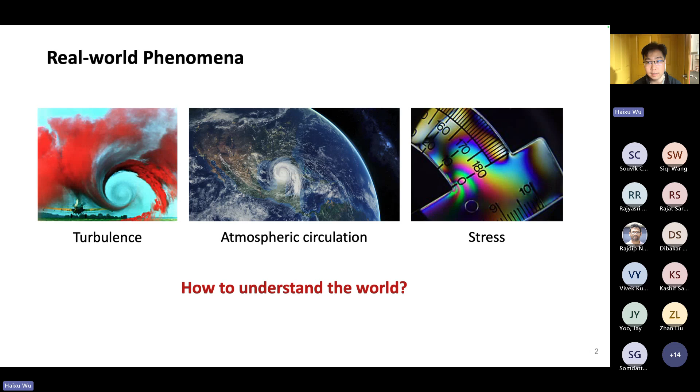Okay, I would like to start with some background. In the real world, there are very interesting phenomena like turbulence, atmosphere circulation and stress. A long-standing and fundamental question is how to understand the world. Because I'm from the machine learning community, a widely used and well-established approach is data-driven, which usually starts from intuition or vision. It means we can record this process as images or videos using a camera or other types of sensors. After that, we can learn a vision model to approximate these dynamics. This approach works in some tasks, which is also named world model by some researchers. However, current video models still struggle in modeling the physics process very accurately. Sometimes the generated results are not very physically reliable.

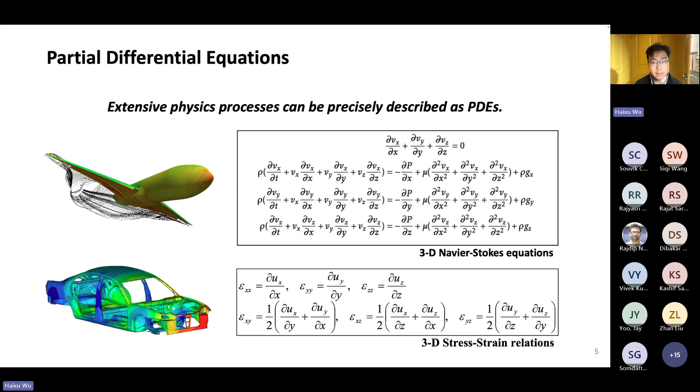If we think about this phenomenon from a more basic view, we will find that these phenomena are inherently governed by scientific rules. Specifically, extensive physics processes in the real world can be precisely described as partial differential equations, PDEs for short, such as the Navier-Stokes equation shown here for fluid dynamics, and the stress-strain relation in solid mechanics shown here. Accurately solving these PDEs is very important in understanding the world and supporting engineering, such as weather forecasting and industrial manufacturing.

However, solving PDEs is actually a great challenge, and the Clay Mathematics Institute lists the problem of Navier-Stokes existence and smoothness as one of the seven Millennium Prize Problems, in parallel with the P vs NP problem in computer science. So it's really hard and usually impossible to obtain the analytic solution of PDEs. Fortunately, after decades of efforts, we have very mature numerical methods, such as FEM or spectral methods. These methods can solve PDEs very stably, but suffer from huge computation cost. If you want to simulate a car, it may take hours or even days. And if you want to simulate some high-speed fluid, it will take more time.

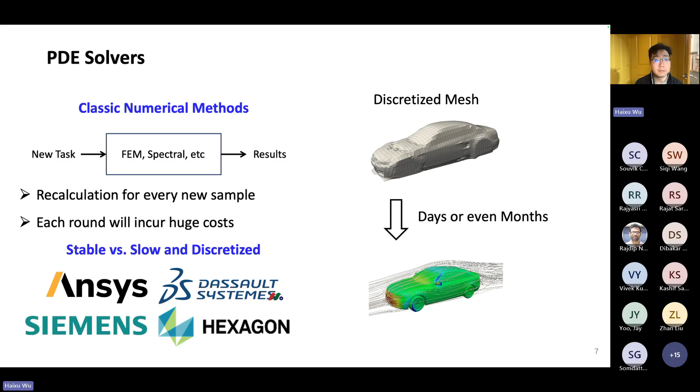Recently, some neural PDE solvers have been explored, which are based on a pure data-driven paradigm. Researchers attempt to utilize the learning capability of neural networks to build an efficient surrogate tool. Once the model has been trained on PDE data, it can make inference within several seconds. So it's very efficient during the inference stage.

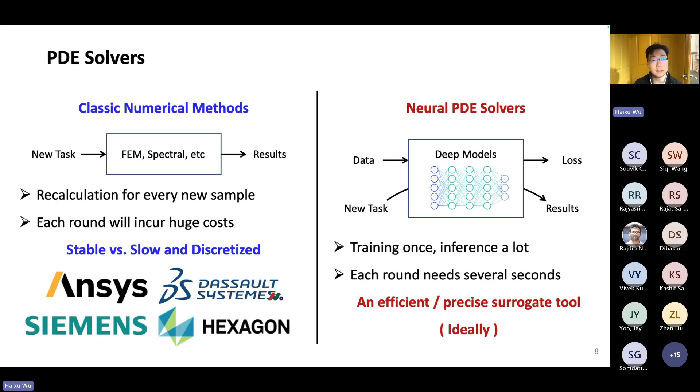And neural PDE solvers have already been used in some simulation software, such as SimAI in ANSYS. The workflow is: you pre-train a model to simulate the car, and after that you can directly apply the model to the design process to get immediate feedback. In this way, you can speed up industrial design.

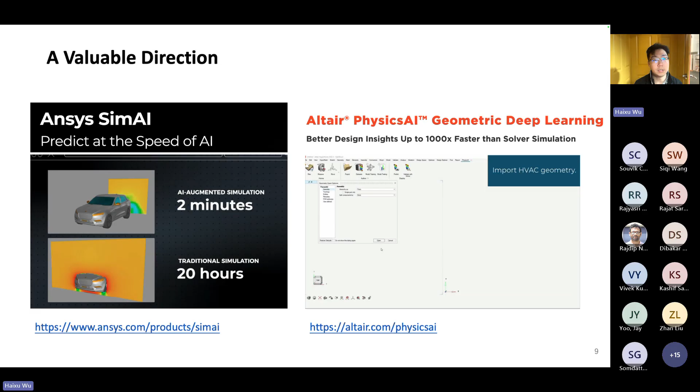And there is another software named PhysicsAI in Altair. This software supports directly applying the PDE solver to CAD geometries, meaning the input is not the computation mesh but the continuous geometry. So it can directly apply to the design process.

And these are two introduction videos to present how this type of software works. There are a lot of industrial software that can enable AI-powered capability. So I think this is a very valuable direction.

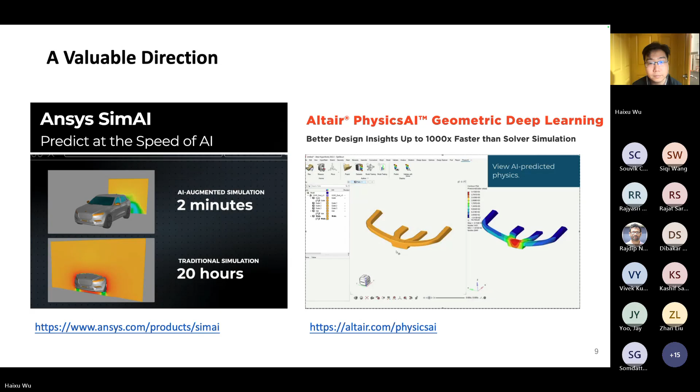And neural PDE solvers are not only a hot direction in the physics community, but also a booming direction in the ML community. Since 2024, every mainstream ML conference holds special workshops or tutorials to discuss the topic. I can still remember the AI for DE workshop at ICLR 2024. The meeting room was so crowded that I couldn't even enter. So I think this is a very hot topic in the ML community.

And additionally, I think PDE solving is still an unsolved problem. You may have seen some demonstrative videos from Google Genie in recent days because it's really popular. The left case is released by Google. You can see Google Genie can simulate very complex fluid dynamics in the realistic world. I think the performance is quite impressive.

And the right one is a test case from Twitter, where we can find this model, although it's good at the realistic world, is still struggling to generate physically reliable dynamics. If we focus on expert domains like industrial design, it's not very perfect.

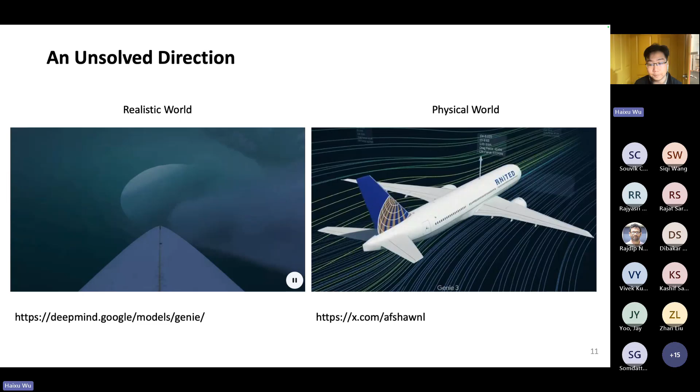During the past 2 years, my PhD lab and I have focused on this challenging problem. We have attempted to build practical neural PDE solvers, which can support complex geometries, high-fidelity simulation, as well as diverse simulation scenarios in industrial design. Due to the time limit, I will only focus on the first two parts, how to solve complex geometries and large-scale meshes, and I will present our exploration in Transolver, Transolver++, and Transolver-3.

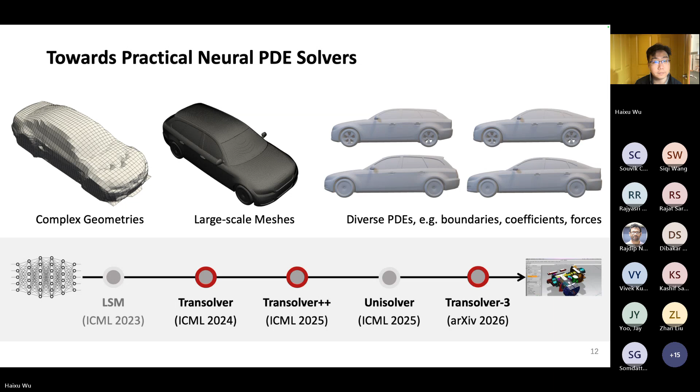Okay, the first one is Transolver, a fast transformer solver for PDEs on general geometries. I would like to start from an industrial design problem: you want to design a car, and you need to estimate the drag coefficient of every design. It requires the model to predict the surrounding wind and the surface pressure, which is quite difficult because it involved a lot of difficulties for neural networks at that time.

First, it needs to handle large-scale geometries, which bring a huge computation cost. Second, it involves very complex and unstructured geometries, so you need a good geometry representation. Third, the governing equation drives intricate physics correlations, because it's driven by Navier-Stokes, and this equation is quite complex under different scenarios.

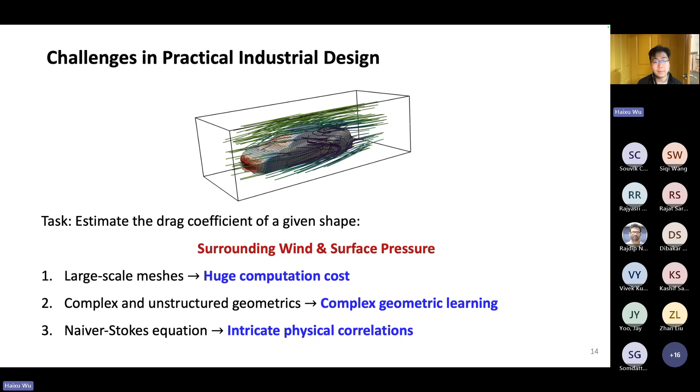Although there are some prior explorations on GNNs, like GNO, and some based on Fourier bases, their performance is not very satisfactory in such tasks. In this work, we want to explore transformer-based PDE solvers. The transformer can be viewed as a foundation of modern deep learning, so if we can introduce such an advanced backbone into the PDE solving community, it will unlock a lot of advanced deep learning techniques. So I think this is very exciting.

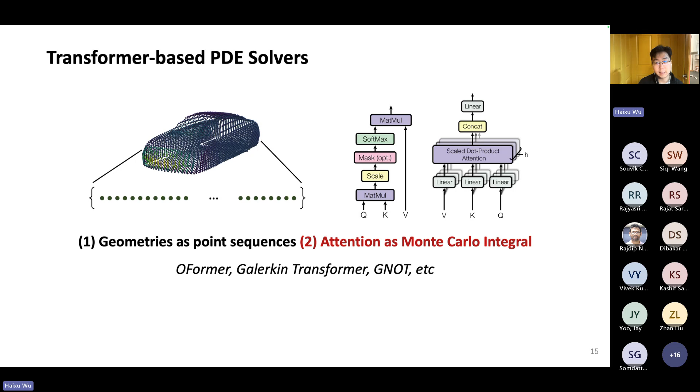Under the PDE solving context, basically we can flatten the computation mesh into a point cloud sequence and adopt the attention mechanism to calculate the physics correlations among different mesh points. This can be formalized as a process to approximate a Monte Carlo-based integral, so it has some theoretical foundations.

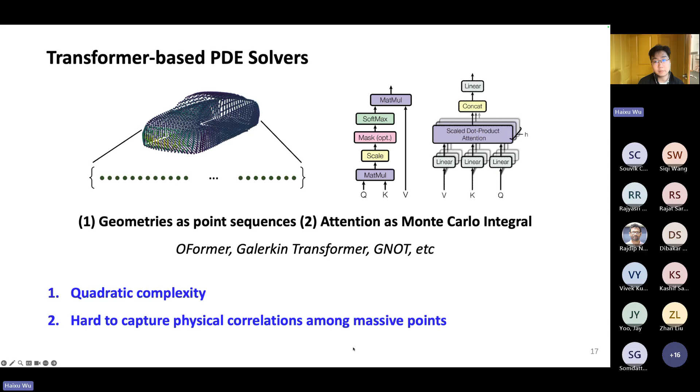And despite there being a good theoretical understanding and expressive capability in Transformer, directly applying the Transformer for PDE solving still suffers from two drawbacks. The first one is quite obvious because attention mechanism is of quadratic complexity with respect to the sequence length. So you can only process meshes within a certain number of points, otherwise you will suffer from the out-of-memory problem. And secondly, it's really hard to capture the physics correlations among massive mesh points. The attention learning will be overwhelmed.

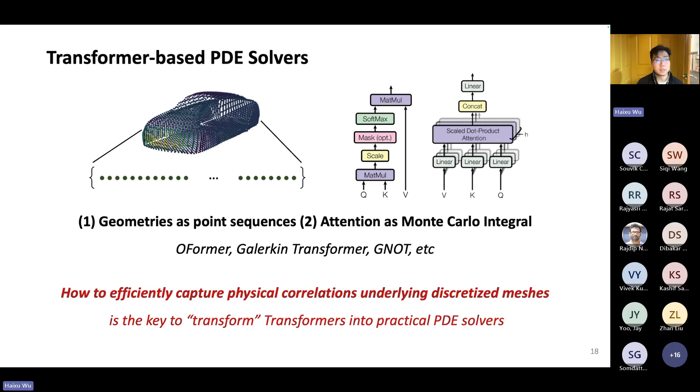But we think how to efficiently capture the physics correlations underlying the discretized meshes is actually the key to turning transformers into practical PDE solvers. So I think this is the key insight when we're designing Transolver, Transolver++, and Transolver-3.

And based on this idea, we want to present Transolver based on a very fundamental idea. As we discussed before, the computation mesh can be viewed as a sampling of the continuous domain. And the previous works are basically trapped in these sampling meshes. So I think their modeling is from a very superficial or unwieldy viewpoint, and they will suffer from many difficulties in computation complexity, geometry modeling, and physics learning.

And in Transolver, we attempt to learn the underlying physical states, which I think is very intrinsic, and it can naturally bring better efficiency, geometry learning and physics modeling. So this is the basic idea of Transolver. We want to get rid of the unwieldy computation meshes and focus more on the continuous domain.

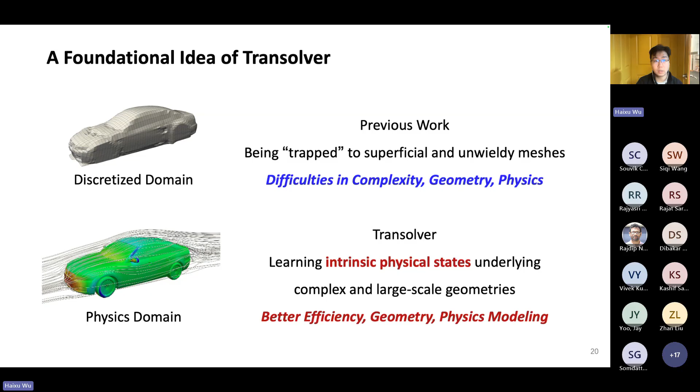And when I'm talking about the physics states, I mean the internally consistent clusters. Here is a visualization of Transolver's learned physical states in different PDE solving tasks. For example, in car simulation, the model learns to ascribe all the front surface, like here, to a token, to a physical state, I mean. The highlighted region means the related points in a certain physical state, and the rear parts of the car are in another state. And we name this learning process of physical states as slice, because it's intuitively like we slice the physics domain into several subparts.

And after that, the physics states are further encoded to several tokens, and we name those physics-aware tokens. If you are familiar with computer vision, you may find that the basic idea is quite similar to the patchify operation in vision transformers. The difference is that Transolver focuses on irregular geometries, and the slice operation is not like the predefined patchify, but is learnable.

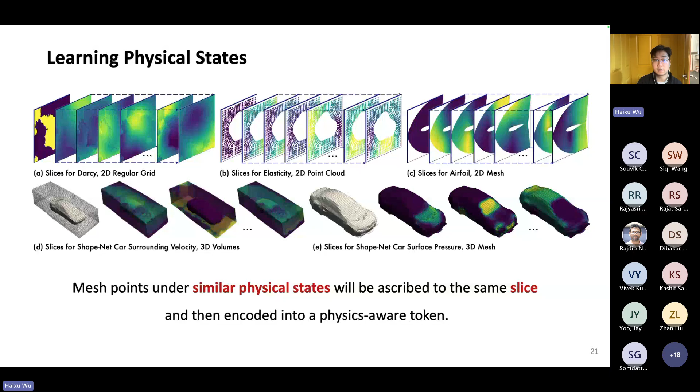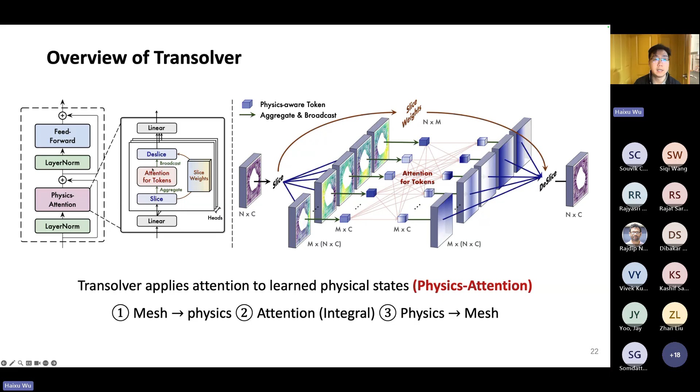Okay, for the first step, we attempt to project the mesh point representation from the mesh domain to the physics-aware tokens. To achieve this, Transolver is designed from a bottom-up view. Firstly, we assume there are M potential physics states inside this task. Then for each mesh point, we apply a softmax-based classification with M categories. After that, we obtain the probability of each mesh point belonging to a certain physical state.

And the softmax operation can ensure a low-entropy slice, which can avoid the learning process degenerating to a global pooling. It's very obvious because, for example, if X has the same probability to be ascribed to every possible physical state, the whole design will degenerate to average pooling. This is very bad because we want to learn some informative physical states to split the whole continuous domain.

So we use the softmax-based design to ensure a low entropy process. And after that, we actually obtain the spatial distribution of different physics-aware tokens like this. This is for token 1, this is for token 2. Then we aggregate the point-wise mesh representations based on the learned slice weights. And this is like a global weighted sum for different tokens.

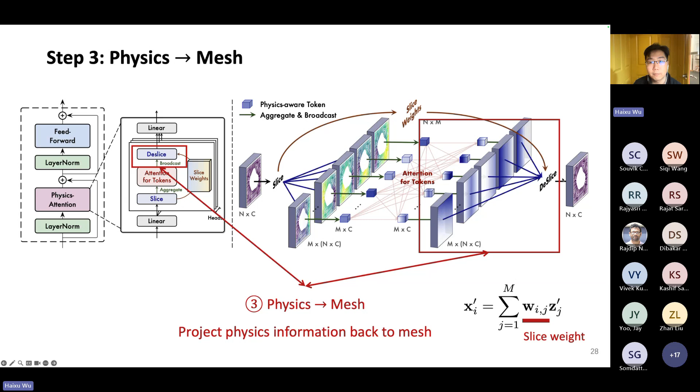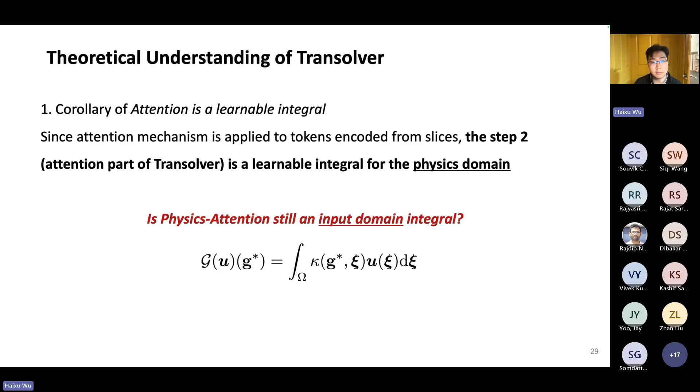And we also provide a theoretical understanding of Transolver. Previously, researchers have proven that attention is essentially a learnable integral in the mesh space. However, in Transolver, the attention is applied to the projected physics domain. So is physics attention still an integral operator? I think the answer is yes, and we have proved that based on these derivations. And during the proof, we can derive all the components in physics attention, like slice, deslice, and attention among slice tokens. So I think this also provides a theoretical justification for the Transolver design.

Okay, this is the technical part of Transolver. In this paper, we conducted extensive experiments to examine the performance, including 6 standard benchmarks and 2 practical design tasks with more than 20 baselines. And the result in our paper is quite impressive. Firstly, Transolver can achieve about 22% error reduction over the second best model in 2024. This is tested on the standard PDE solving benchmarks proposed by Zongyi Li.

And besides, Transolver also excels at design tasks. Here we adopt Transolver to predict the surface and surrounding physics quantities of driving cars and flying airfoils. Transolver can accurately predict the physics field with complex geometries like the connection part of the windshield and engine hood. And also we calculate the drag coefficient and lift coefficient from model-predicted physics fields. The R squared for these physics quantities is over 99%. So it's quite practical if you use this model in benchmarking different designs.

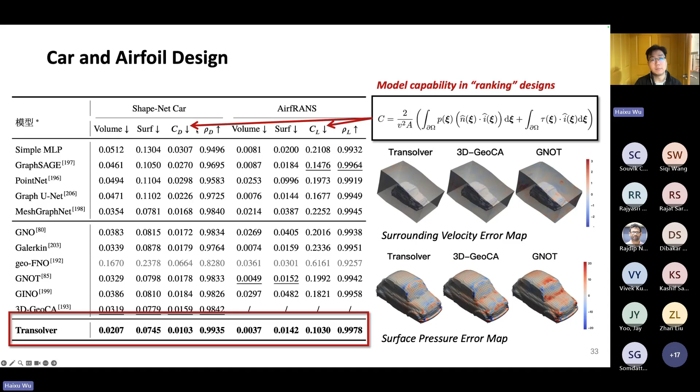And besides, because we are using a transformer backbone, Transolver demonstrates very favorable scalability. We test three things. The first is model performance with respect to the input resolution. The second is the model performance under different data sizes. And then we keep increasing the model parameters to see what the performance change is.

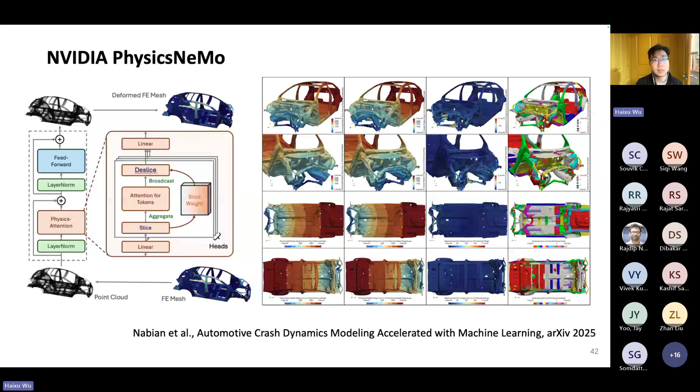They also test Transolver in industrial crash tasks. This is very surprising because this task contains very complex fractures and nonlinear deformations, and Transolver can also be applied to such complex tasks. Okay, that's about the Transolver part. This is the first paper we published in this Transolver family.

So although the performance is quite impressive in vanilla Transolver, it actually has some, I think, kind of magic design. For example, in the slice operation, why we adopt the global weighted sum to generate the physics-aware tokens. Obviously, you can do something like cross-attention, so why weighted sum them? And besides, during the deslice operation, why we reuse the previously learned slice weights for the deslice? You can newly learn a weight tensor for the deslice or adopt the cross-attention.

Actually, previously some researchers reached out to me to discuss these two designs. And honestly speaking, I did not know the answer when I initially designed the Transolver. I just adopted this design because they are simple and parameter efficient. But lately, I find that these two magical designs are actually the unique feature of Transolver, which can be fully utilized in Transolver++ and Transolver-3 to support scaling up the geometry to billion scale. It's quite surprising to me. Next, I will talk more about how these two unique designs can be used in supporting Transolver++ and Transolver-3.

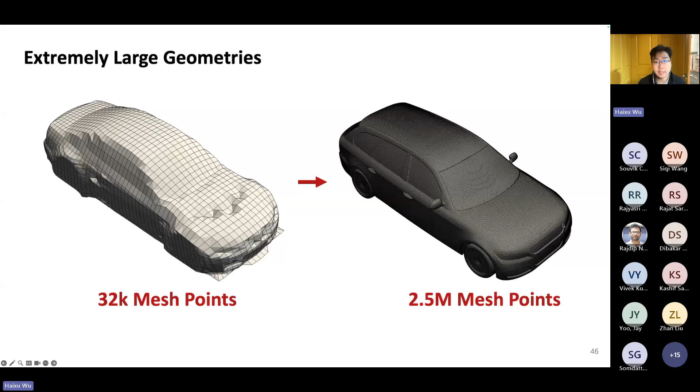Okay, the next is Transolver++. In this paper, we built an accurate neural solver for PDEs on million-scale geometries. Here is an intuitive case. The left benchmark is tested in Transolver. It only contains around 30,000 mesh points. And the right one is a task we want to solve in Transolver++, which contains millions of mesh points in each case. Notably, the right one is actually what we want to do in industrial practice. So I think this progress is quite significant.

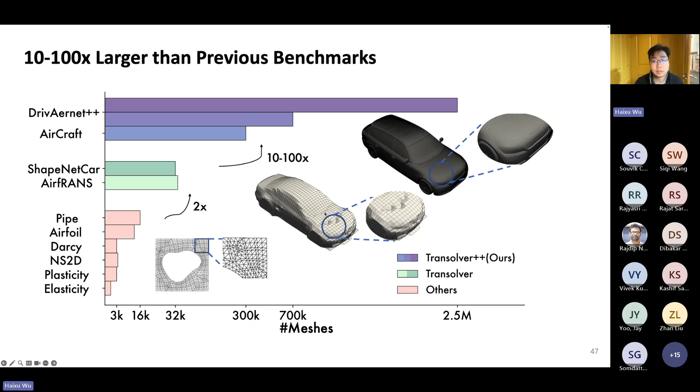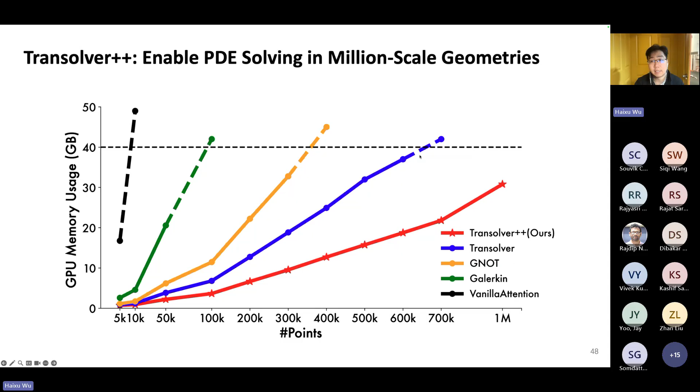Concretely, the geometry of Transolver++ is about 100 times larger than the previous benchmarks. And we have done our best to fit the largest PDE solving task in Transolver++. Specifically, if we benchmark the upper bound of geometry size in one single A100 GPU, the upper bound is 0.6 million in Transolver and 0.3 million in GNOT. None of the previous work can handle million-scale geometries in one single GPU, and Transolver++ is the first one to achieve that.

Actually, the large-scale geometries will bring many new challenges to PDE solving. This is quite intuitive because if you cast the problem as a sequence modeling task, like large language models, making a large language model able to handle millions of tokens is not only a scientific problem, but a very challenging engineering task. Currently, researchers and engineers have made a great effort to speed up the AI infrastructure. Therefore, we also want to solve the challenge of scaling up geometries by building a domain-aware analysis. Actually, we are doing something like a system design.

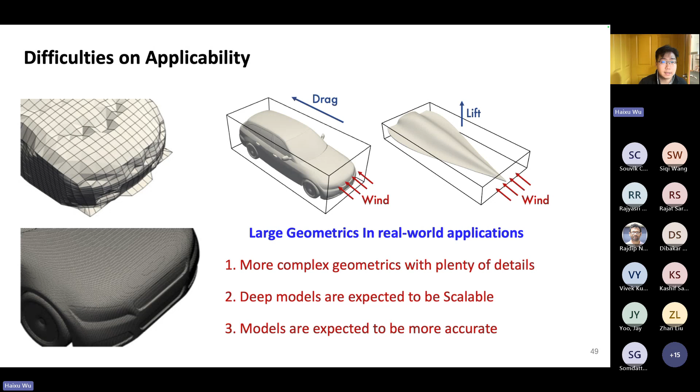Okay, let's recap the design in Transolver. We have 3 steps: from mesh to physics, physics attention, and from physics to mesh. And if you apply Transolver to large-scale geometries, we find that it may suffer from 2 main challenges. The first is homogeneous physical state.

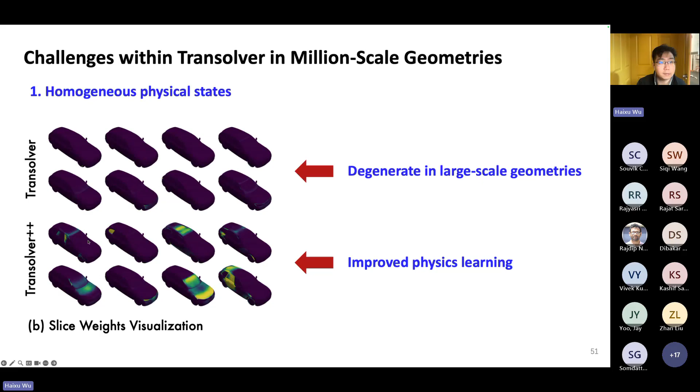And in Transolver++, actually, we improve the physics learning process to enable a very informative physics learning to guarantee informative physical states. And secondly is the efficiency bottleneck. For million-scale geometry, even an intermediate representation will consume about 2 GB of the GPU memory. So if we consider an A100 GPU with 40 GB memory, which can only take about 20 representations. So it's a very strict constraint for architecture design.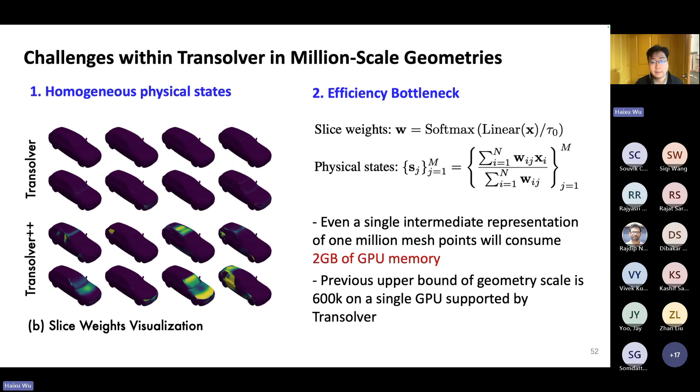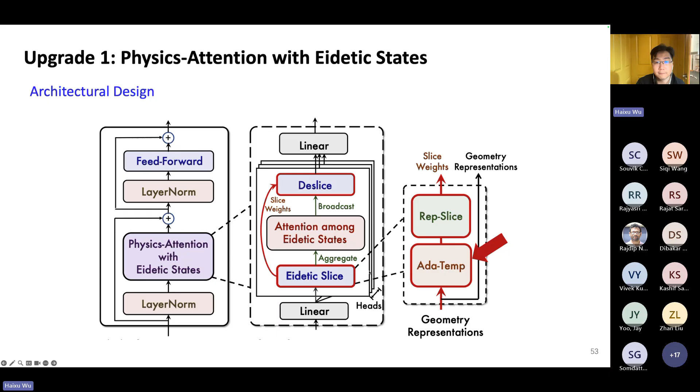And in Transolver++, we made 2 upgrades. The first is upgrading Physics-Attention with eidetic states. And specifically, we adopt an adaptive temperature for the slice operation. So what's the benefits of adaptive temperature? Let's take the car simulation as an example.

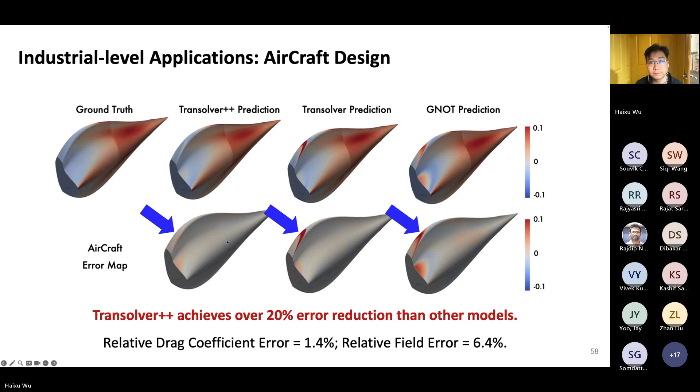And with Transolver++, we finally support the industrial applications, like the showcase here in DrivAerNet++. Our model achieves over 20% error reduction compared to the other models. And in aircraft design, Transolver++ is also better in a high-speed simulation task, which achieves lower error in the sharp edges like this. Okay, that's about Transolver++ with scaling up the geometry by a parallelism framework.

And at last, I want to talk about our recent work, Transolver-3. Actually, we just finished this project a few days ago, and the preprint paper will be released this week. In this paper, we actually want to go back to the original design of Transolver and demonstrate that with the special training and inference strategy, Transolver is still the state-of-the-art in the latest high-fidelity benchmarks, although it has been published about 2 years. The title is Scaling Up Transformer Solvers to Industrial Scale Geometries.

And in this paper, we actually focus on over 100 million cells geometries, which is over 10 times larger than the benchmark of Transolver++ and over 1,000 times larger than the vanilla Transolver benchmark. This is a very exciting problem because even the extremely optimized AI infrastructure for large language models cannot support over 100 million tokens in one inference. And we can achieve this in Transolver-3.

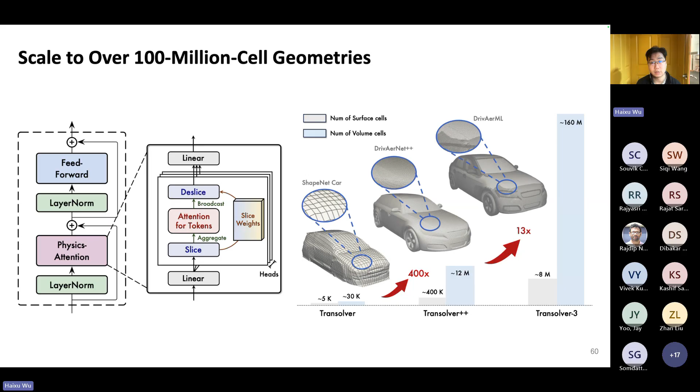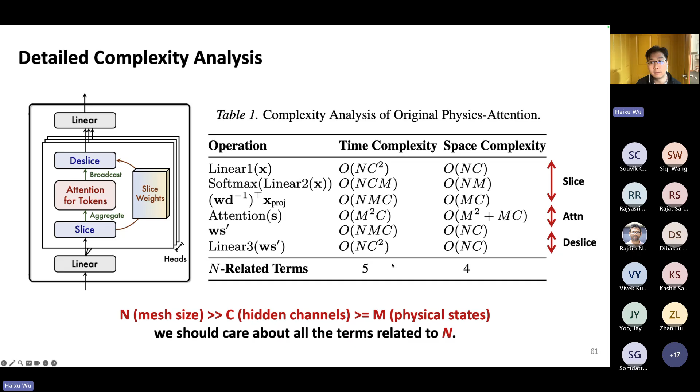And if we dive into the computation of slice and deslice parts, we have a very interesting finding: these operations have a very large intermediate representation, like here. This is with shape N, N times C. And the additional memory cost is actually because of our writing habit in PyTorch code.

Because in practice, you will use PyTorch for the implementation, and you will leave some intermediate representations. This is a writing habit; I want to write the code in a clearer format. So in this way, I will leave some intermediate representations, but these are not necessary in the computation. And we can remove this large intermediate representation by changing the association of matrix multiplication.

For example, in the slice of Transolver, it's basically doing some multiplication like this. And with this, you will have a very large intermediate representation as a result of these two multiplications. Then you can change the association order from this to this. In this way, you can remove the large intermediate representation to save memory and time.

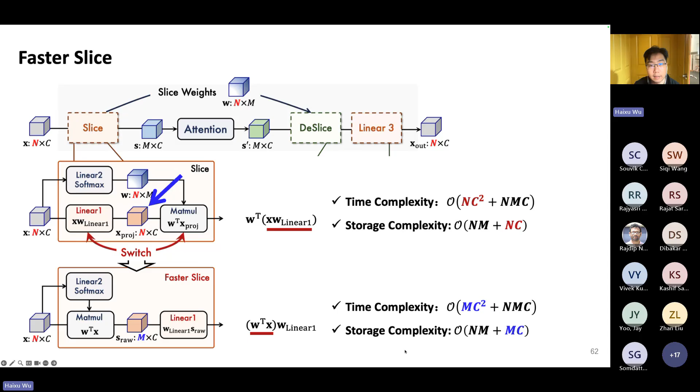With this design, we can successfully remove the big O(N) operation. Similarly, in deslice, we can do the same thing to remove another big O(N) operation in the deslice process. So based on the optimized slice and deslice, we further build a new training strategy for Transolver-3. Because in this paper, we want to handle hundreds of million scale geometries. It's quite large. You cannot load all the geometry into GPU simultaneously.

So we propose an amortized training strategy. Outside the model, we randomly sample subsets from the huge mesh at every iteration. This is actually an amortization design. We are basically doing the amortization to amortize the training overhead into multiple iterations.

And inside the model, we adopt the gradient checkpointing technique to avoid storing the intermediate activation tensors, and use in-sequence computing to reduce the peak memory usage. The inside design is trading computation for memory. Basically, you can view this operation like we want to encode the Transolver parallelism framework inside the model, not based on multiple GPUs. And during inference, we also propose a new strategy.

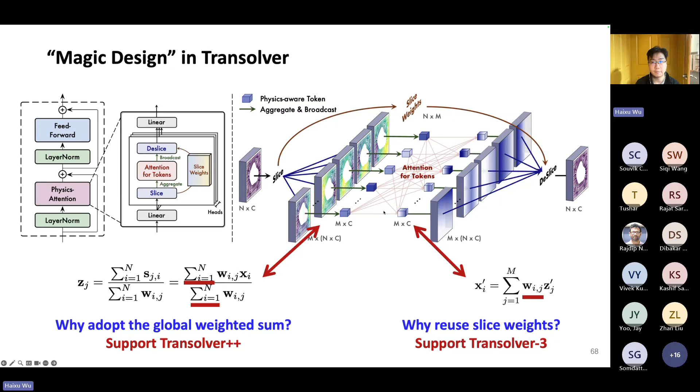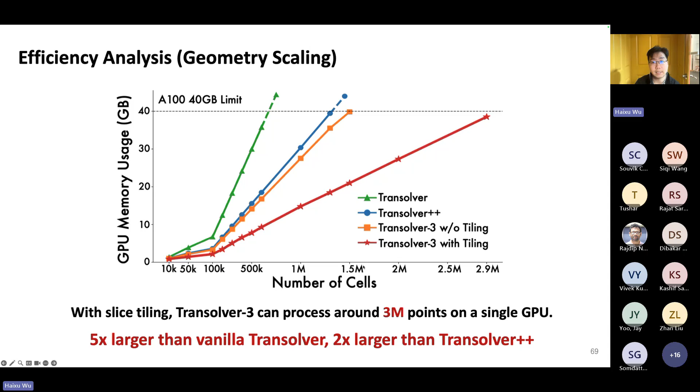And it's about 2 times larger than the Transolver++. Along with the amortization training, it can support industrial scale applications. And in this work, we have made an exhaustive optimization for the physics attention. I think we have done our best to accelerate the calculation of physics attention. Although it cannot reduce the GFLOPs significantly, in practice it will give a 3 times speed up for the inference latency, which is quite impressive.

And here we test Transolver-3 in the largest PDE solving benchmarks, including the NASA CRM, AhmedML, and DrivAerML. The largest one contains about 160 million cells per sample. And in total, it will have a 31 terabyte dataset for the training and the inference. The result is very exciting. Without any architectural design, only upgrading the training and inference paradigm, Transolver still achieves the best performance.

Here are some showcases. You can find the Transolver presents lower error in the complex geometries, like here and here. And we can find the Transolver-3 can better predict the wake flow, like the splitting flow here and here. While in other models, the prediction is not satisfactory.

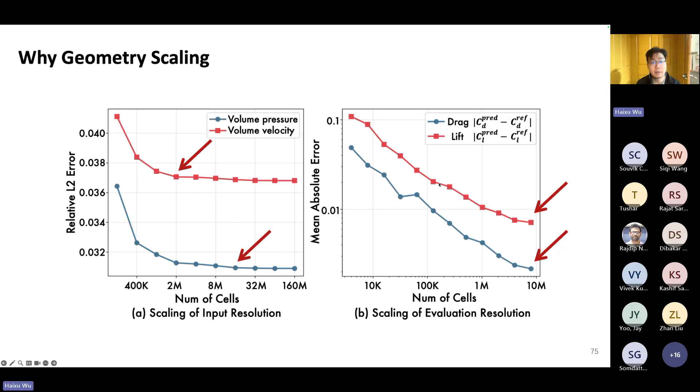And if you look back to the journey from Transolver to Transolver-3, the geometry size has been largely improved. So why do we pursue the geometry scaling? I think the answer is we are actually pursuing the ultimate accuracy. Just as I mentioned before, the computation mesh is just a sampling of the continuous domain. So if we can process the large geometry, we can ensure a more accurate approximation of the physics field, as demonstrated by the geometry scaling curve shown here. With large geometries, we can have better accuracy.

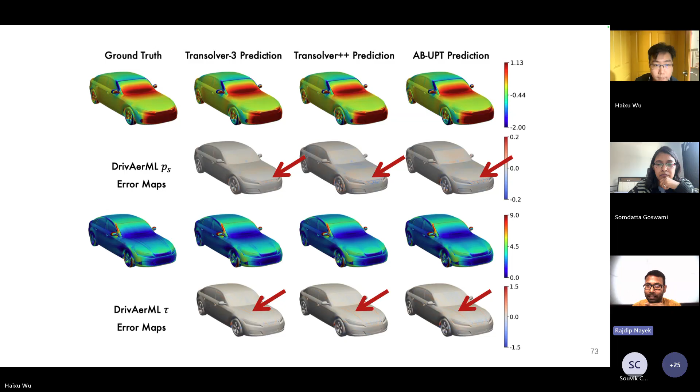Okay, great. Thanks. The second question is, what I understand is these physics-aware tokens that you talk about are basically like you have these mesh points, and instead of taking each mesh point as a token, you're taking, for example, if I see this example, this was very useful for my intuition, like you have the bonnet of the car and that becomes one particular token, right?

Yeah, we projected the surface into multiple tokens. It's like you do the clustering on the point-wise representations. You have different clusters, and each cluster is projected to one token. Yeah. Okay. So from that perspective, I was thinking, is it necessary to actually mesh the entire thing and then get the tokens, or can you also do the same directly on the CAD geometry?

Actually, okay, I was just thinking about this question, because you're showing these images of cars, and I was thinking you could also get these images as a CAD model, and then you probably would not need to mesh it first, but use it directly. I'm just trying to understand if it could be possible.

Yeah, this is a very interesting topic, actually. I think you are posing a very promising direction for a Transolver upgrade. Recently, I also did some research about CAD programs, because they basically represent the geometry with boundary representations, like you record several control points and the weights of control points. So I think if we can encode these control points, just input the information of the control points and do the slice operation, you can also get some aggregated slice tokens like here.

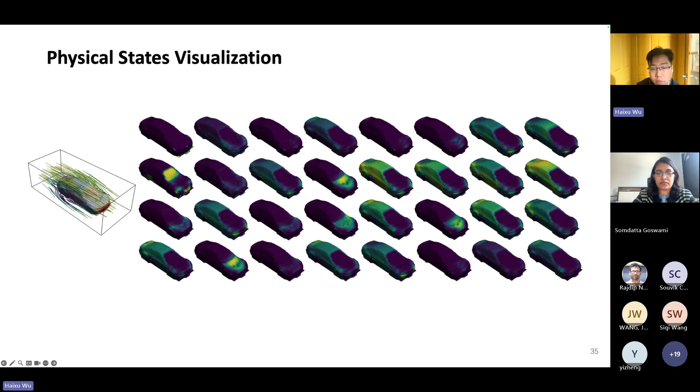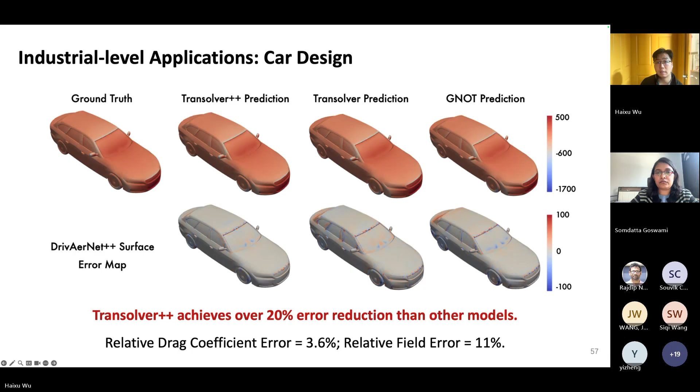Yeah, that is a good point. Actually, I also thought about this question during the development of Transolver-3. I think the answer is, in Transolver++, we basically want to input the entire mesh into the GPU. We do not want to do any approximation for the calculation of Transolver. So all the designs in Transolver++ aim at ensuring Transolver can process million-scale geometry simultaneously inside one GPU. That's why we want to use the eidetic slice tokens, because if you input Transolver with a very large mesh, it will cause degenerated physical states.

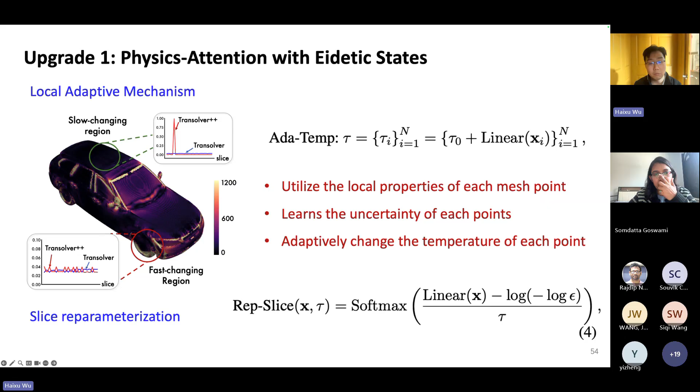Well, in Transolver-3, we basically do some approximations, because we do not calculate the physical states based on the equivalent computation by multi-GPU communication. We just do the amortization. We just split the input mesh into several subsets. So in this case, every inference will only receive, I think, not million scale geometries. It's just like 30 thousands of mesh points in each inference.

And in such a limited mesh set, you do not need the eidetic slice to ensure a good representation learning for the slices. So that is why we use different directions in Transolver++ and Transolver-3, because in Transolver-3 we actually do not need to handle the large scale geometries, because you're doing the amortization outside the model. It's an approximation, but it works in the extremely large geometries. So

if you want to do some applications with large geometries, for example, if you want to handle million scale geometries, I think Transolver++ is still a good choice. But if you want to scale the geometry into hundreds of million scale, you have to do the amortization. And in this case, you do not need to apply the eidetic slice, just use the original Transolver.

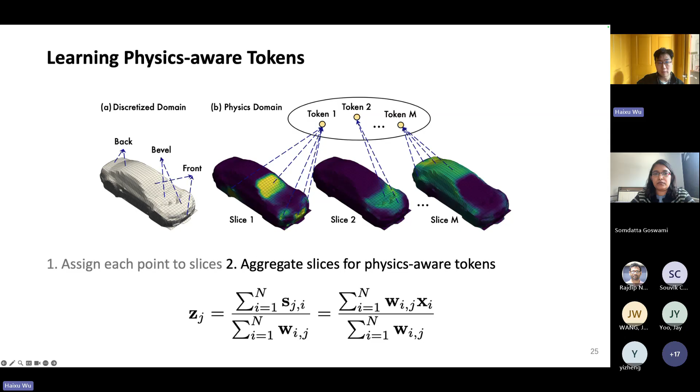I think this is the design. So maybe you are curious about why this design works. I also thought about this and gave some explanation in Transolver's paper. I think it works for two reasons. The first reason is if you think about this problem from a backward view, if you want to reduce the final loss function, the optimization process will drive the linear classification layers to learn some informative things. If you just learn a random classification, the tokenization process is like an average pooling.

So the whole attention will degenerate to an average pooling. You cannot decrease the final loss. So this is the first understanding. And the second understanding, I think, is from the architectural design. We are basically doing the softmax. Actually, softmax is a very interesting

function in attention mechanism. And if you are familiar with some ML systems for speeding up the attention calculation, you will find that softmax is a very important component because it basically makes the distribution from a uniform to a peaky one. So in this way, it will enforce the model to learn some very confident classification for each mesh point. Because we are using softmax, it's less possible to learn a uniform distribution.

So this will make the model easier to learn some informative tokens. So I think those are two explanations for the slice operation. Yeah. I see. Thank you.

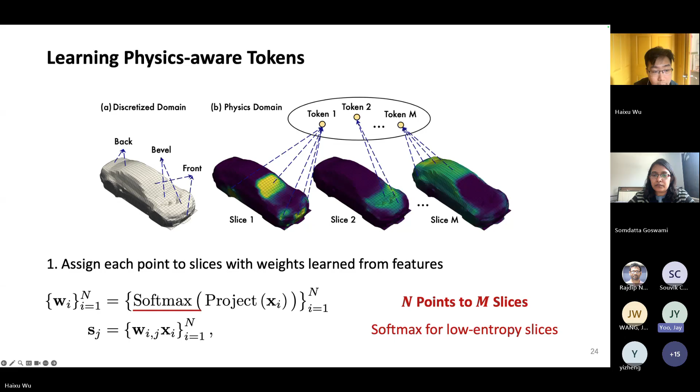Then my second question would be, for Transolver-3, you said you're sampling subsets of the original mesh points. Were there any heuristics, or is it all uniform random selection in this case? Yeah, in this paper, we only do the uniform random sampling.

And I think if you want to do the amortization training, during the later stage of the training process, the amortization is also an approximation of the entire mesh forward, because the learning rate is very small and the parameter optimization is very close to convergence, so you can prove that amortization training is basically equivalent to the entire mesh forward. Yeah.

I see. Thank you for the answer. Okay, thank you. Thank you, Jay. We'll take a last question from Bam. Yeah, hello. Nice talk. Thank you very much.

I'm wondering what training data size Transolver can handle. I'm really focusing on scarce data, like 50 designs or 100 or 150. But from my understanding, these neural network methods require larger data sets. How does Transolver handle data-scarce situations?

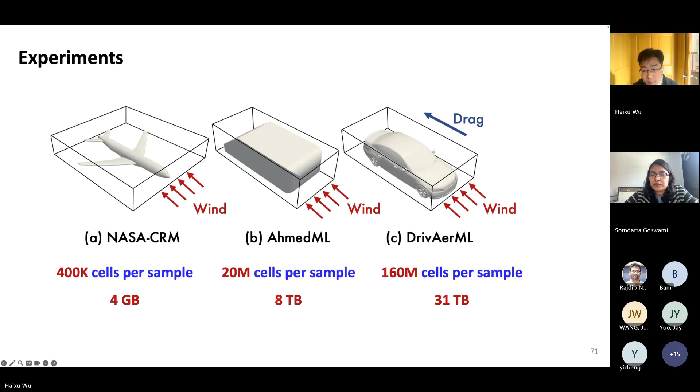I think currently most of the benchmarks are CFD based. They want to simulate the fluid. If you're looking at the physics field here, you will find that the whole physics field is very continuous across spatial positions. So in this task, I think deep learning will work very well because it can approximate the manifold very accurately and produce a smooth result.

I also tried Transolver and other neural operators in some structural analysis tasks, like modeling the inside stress and the earthquake response of a building. And I found that all the neural networks fail in modeling this task. Their relative L2 will converge to about 20%. I think this is not a good result.

Yeah, because right now I'm doing PCA-based dimensional reduction, then fitting a regression model for each component that I'm getting. And that result is better than, let's say, DeepONet or Point DeepONet, the current existing operator methods, but I haven't tried Transolver yet. I'm reading the code and trying to understand it.

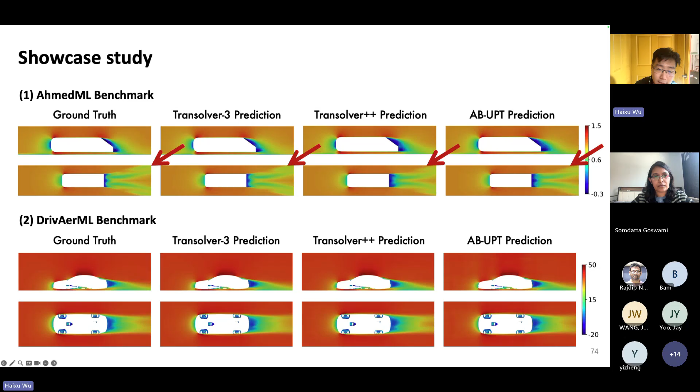Yeah, I think that is a great point. In Transolver's paper, we do some visualization and find that maybe the Transolver architecture is inherently multi-scale: in the beginning layers, they capture some fine-grained information. In the upper layers, they capture some more abstract representations. So I think this architecture can actually capture the multi-scale information. That is why current vision transformers, just ViT, a pure transformer, can capture the multi-scale patterns in images.

And I think it's important to pay attention to the fine-grained details, because that is definitely something I cannot do, and Professor Yu and your team are the experts in mechanical engineering, and you will find some drawbacks in current deep learning architectures, and identify why they cannot produce the fine-grained details.

And in Transolver, if you think about the physics attention from a very shallow view, like why we can reduce the computation complexity, this is because we are doing something like sparse learning. We make the correlation modeling into a sparse version. It definitely removes some valuable correlations, but it's a trade-off between efficiency and performance.